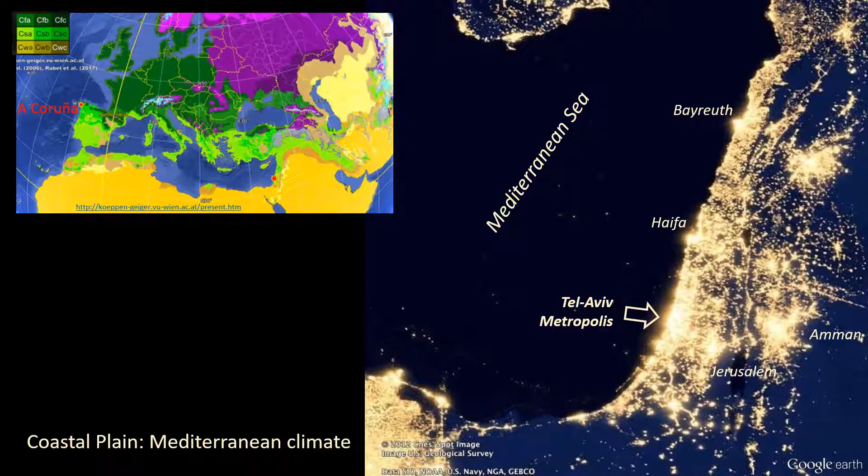My name is Inbal Gadish and I'm honored to talk about thermal comfort in public spaces of a densifying Mediterranean business district. Working as a regional planner in Ramat Gan municipality, I'm responsible for town planning in my case study area. Israel is located in the eastern part of the Mediterranean zone, which is a hotspot for climate change. Some of its geographical characteristics illustrate the need for optimizing the use of lands in the country.

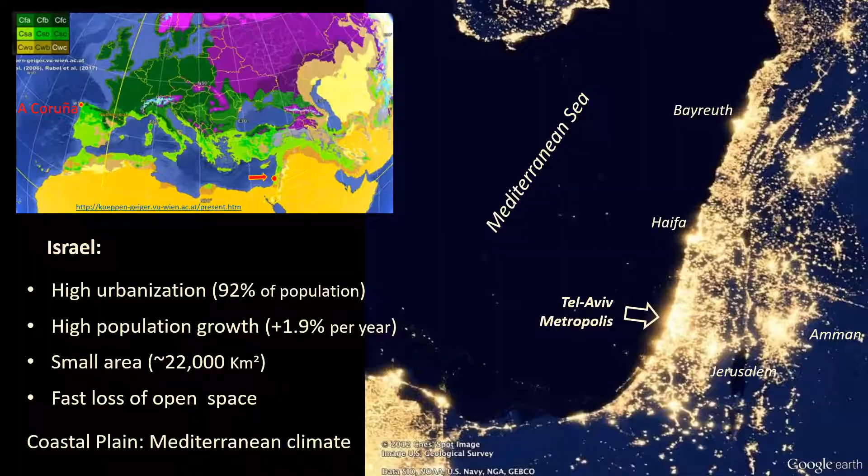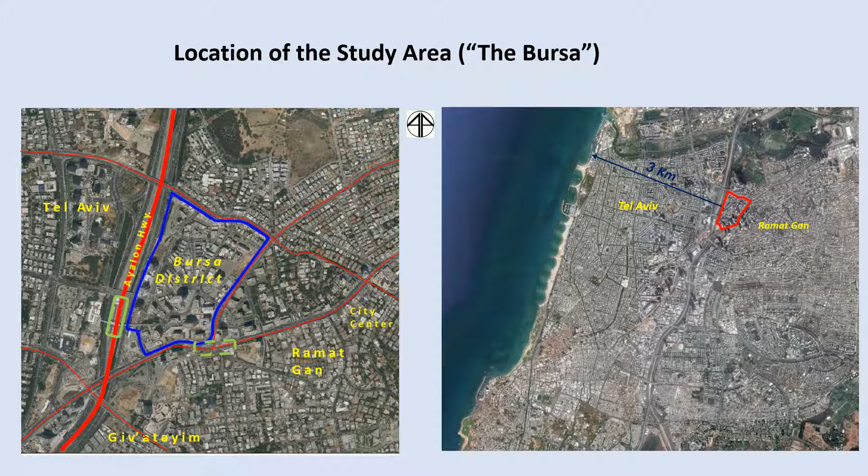Our case study area is a historic diamonds exchange and industry district called the Bursa. It comprises about 30 hectares of mainly office buildings located in the central metropolitan area in Israel, about 3 kilometers from the coastline. A new master plan promoted by the municipality permits multiplying the 1 million square meters of existing built floor area by about 3.5 times, which may lead to an extremely dense LCZ1 all over the complex. The plan visions the district as a bustling multi-purpose urban center.

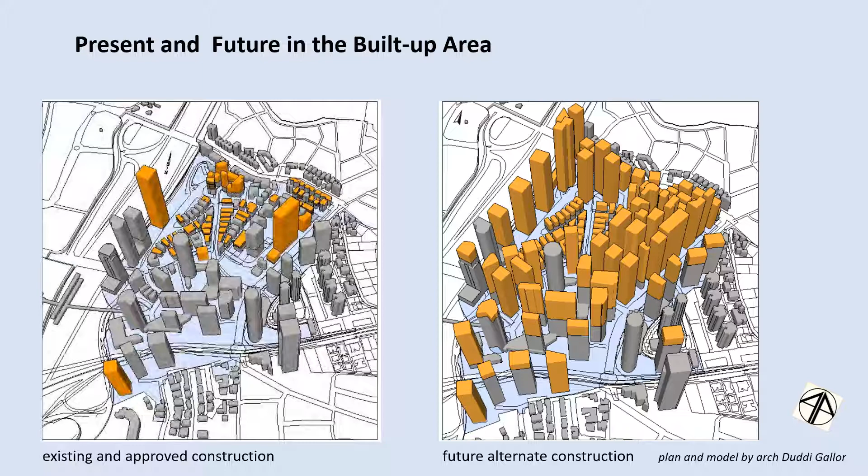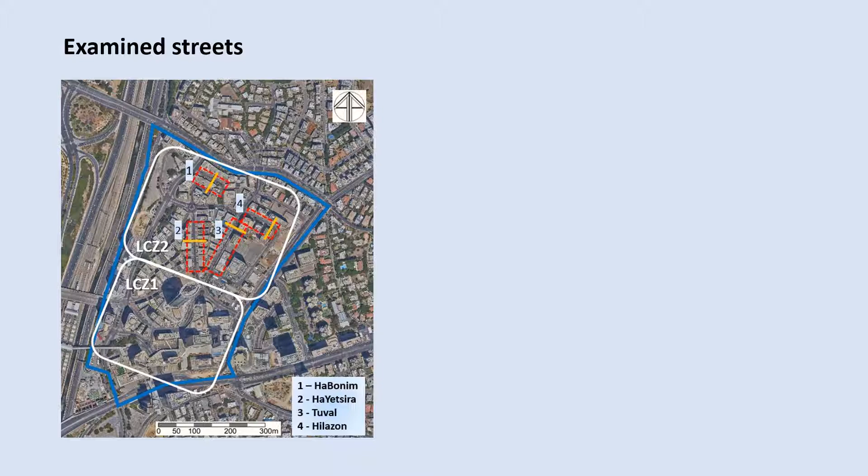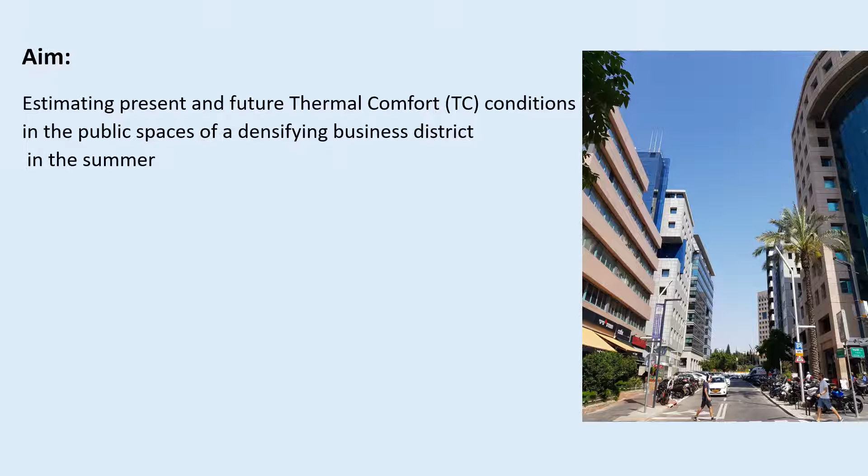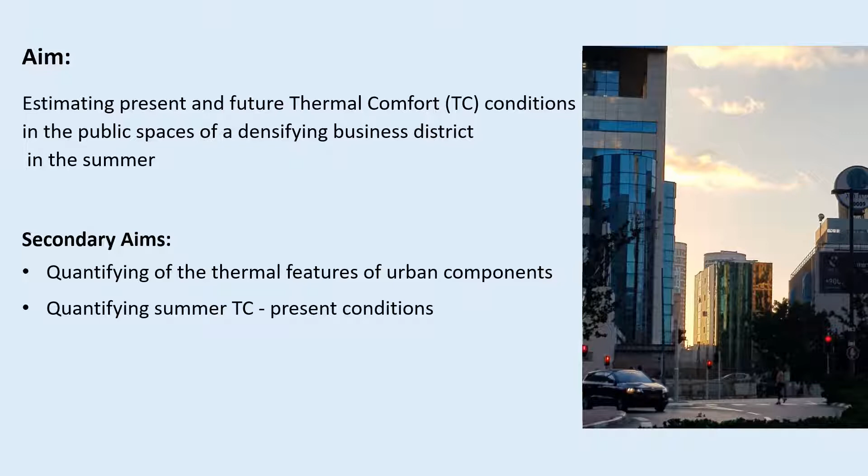Our case study streets are located in the northern densely built section of the district, characterized by LCZ2. We focus on two approximately perpendicular streets described on the right, including existing and predicted sections due to the new master plan. So, the main aim of the research is to estimate present and future thermal comfort conditions in the public spaces of a densifying business district in the summer, and the secondary aims deal with quantifying the thermal features of urban components, quantifying present summer thermal comfort conditions, evaluating future thermal comfort using sensitivity tests, and examination of customary approaches to reduce thermal stress.

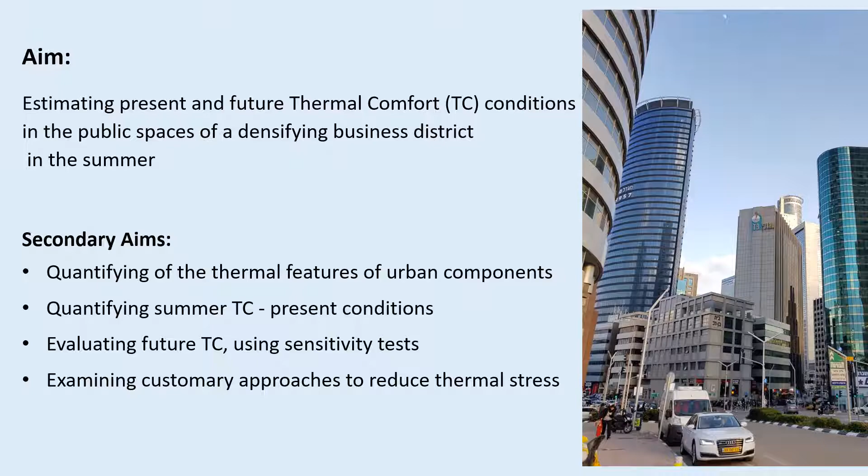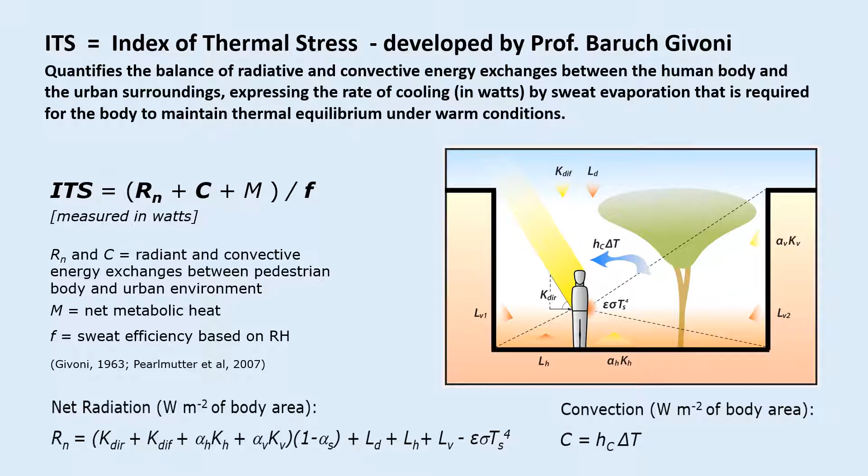We use the index of thermal stress for the evaluation of the thermal sensations. It was originally developed by the late Professor Baruch Givoni, to whose memory this conference is dedicated. Some of you may know this index and be interested in several improvements we put into it for this work. It enables a comfortable and simple tool for dealing with complex issues. Measurements were conducted at the end of June last year on a typical summer day. Thermal characterizing of horizontal and vertical street surfaces is a unique requirement of the ITS.

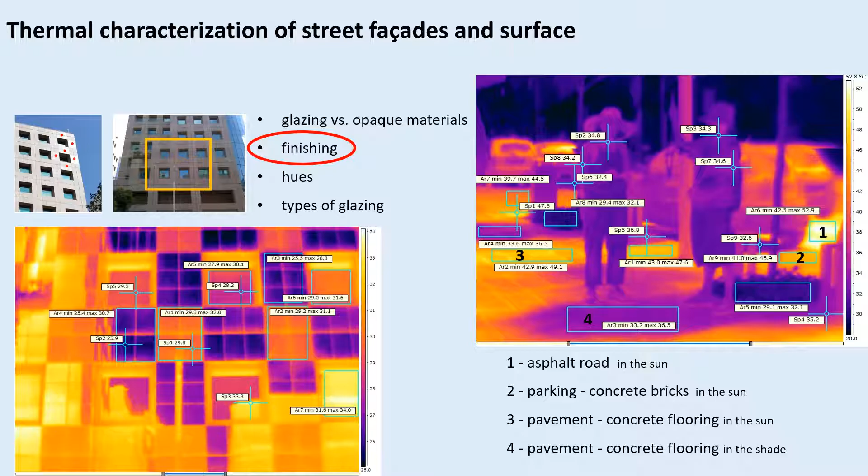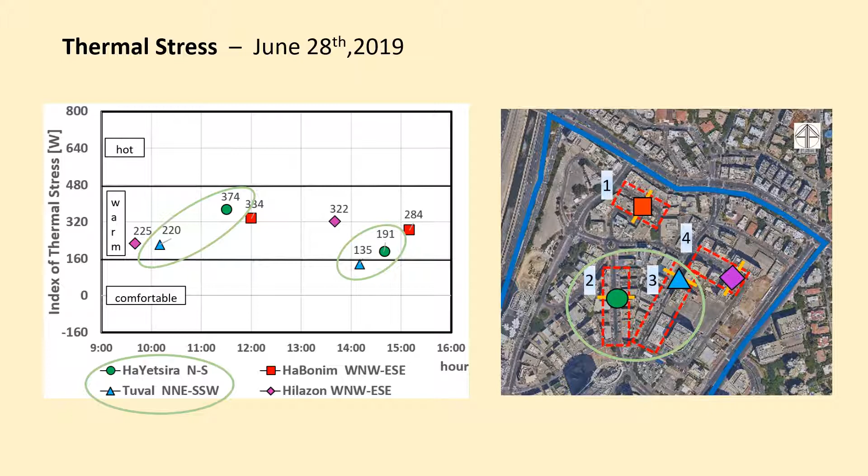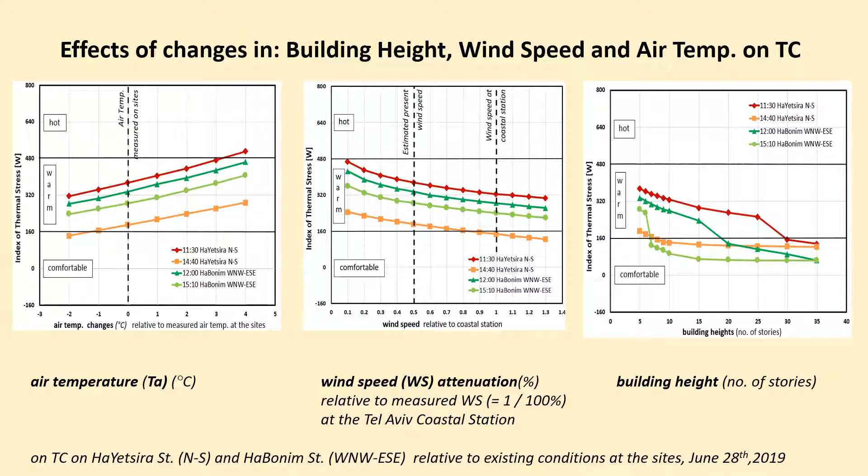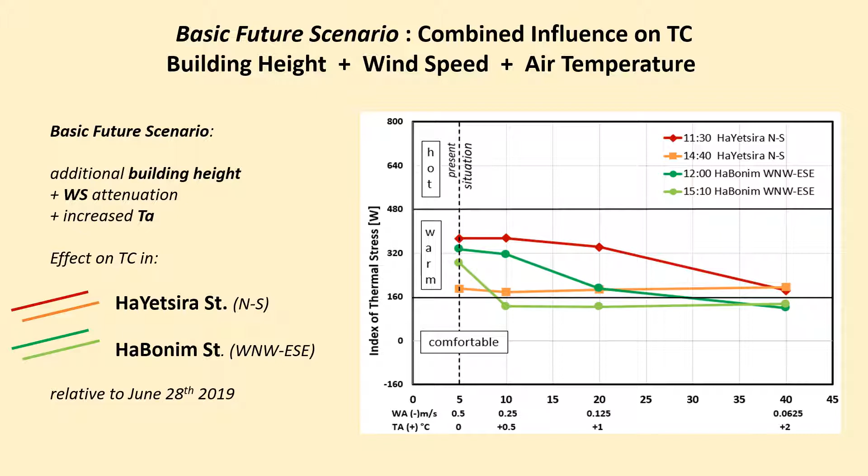We assembled the basic future scenario combined of the main variable of building height with correlated predicted changes in air temperature and wind speed attenuation. But although high construction is expected to ease the thermal stress, weaker wind and higher air temperature will worsen thermal comfort. All this refers to a hypothetical person who is in the center of the street cross-section.

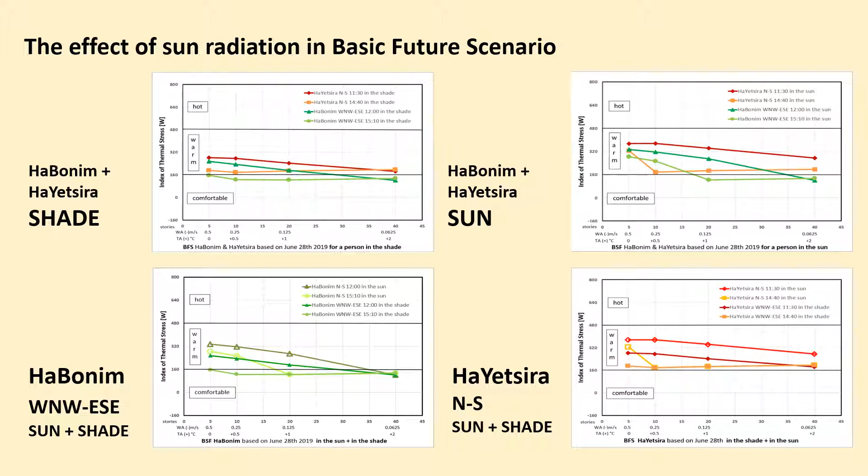Comparing between ITS of basic future scenarios for a person standing in the sun and in the shade reveals the effect of sun radiation on thermal comfort. The bottom graphs clarify how much hotter the north-south street is compared to the perpendicular one, even under high buildings. A combined influence of relative humidity with wind speed and air temperature reveals an extreme exponential impact on thermal comfort.

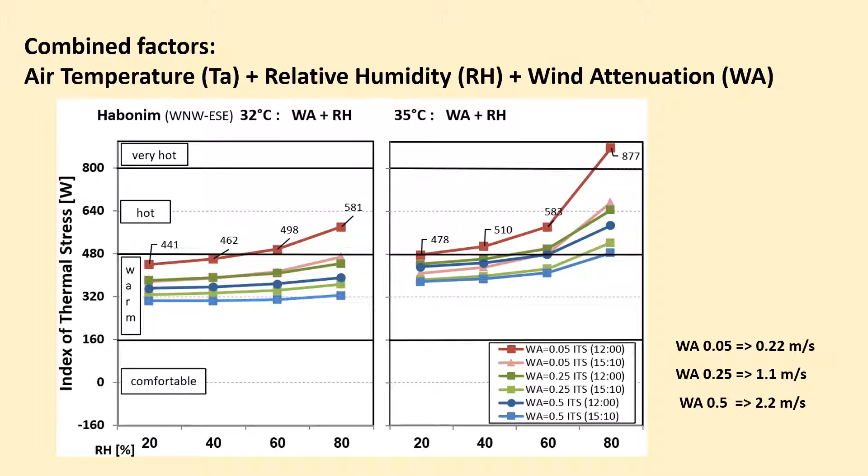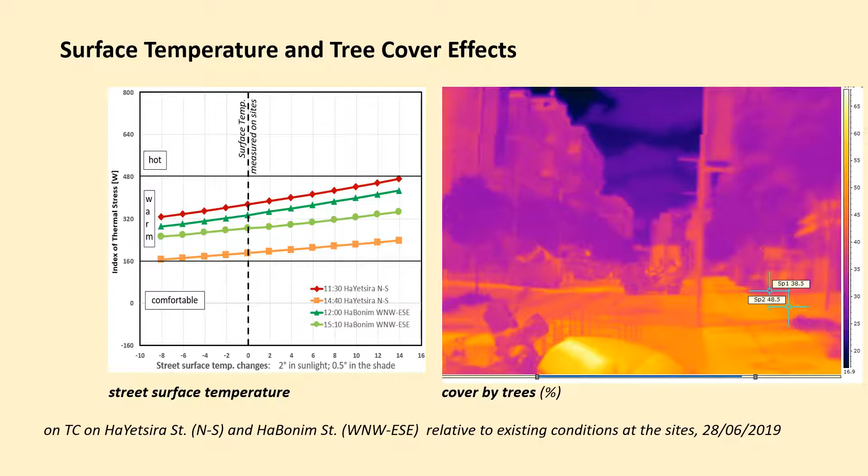Using cool materials for street horizontal surfaces is proven to decrease its temperature. We quantified its possible effect on thermal comfort. Trees improve environment and human welfare in many ways. ITS quantifies the effect of trees cover in the street on thermal comfort.

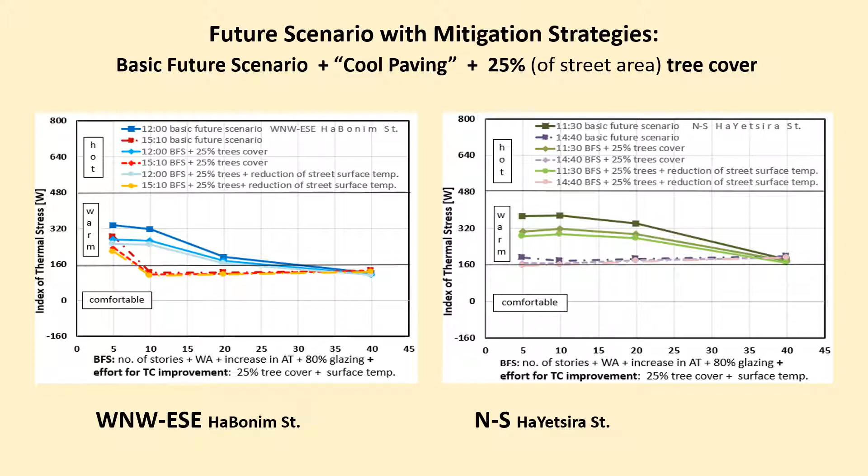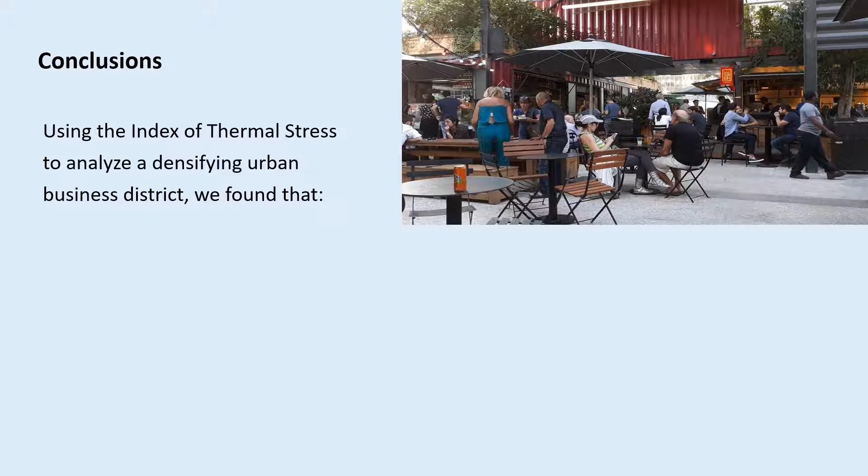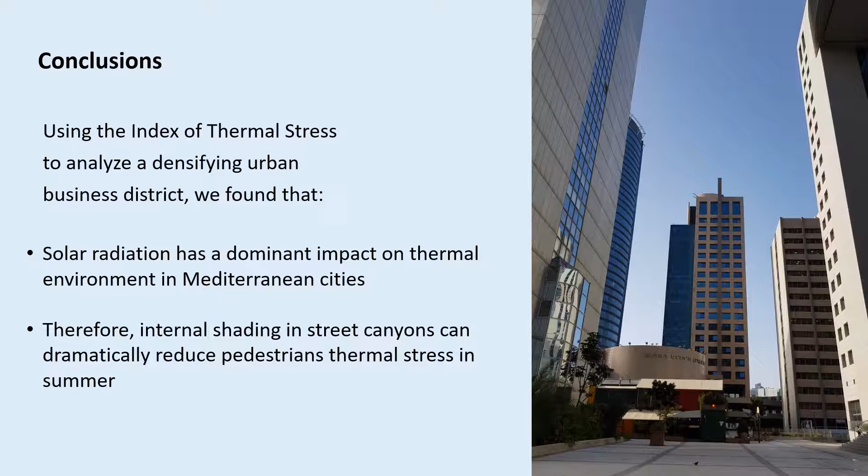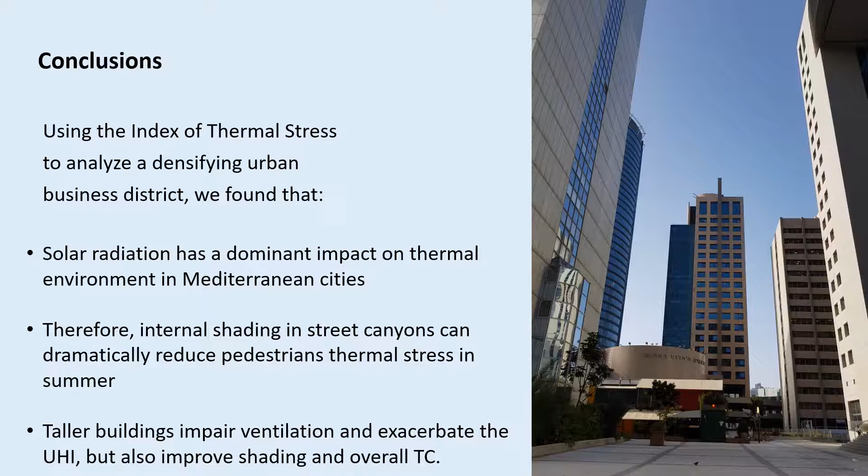In summary, using the index of thermal stress to analyze a densifying urban business district, we found that solar radiation has a dominant impact on thermal environment in Mediterranean cities. Therefore, internal shading in street canyons can dramatically reduce pedestrians' thermal stress in summer. Taller buildings impair ventilation and exacerbate the urban heat island, but also improve shading and overall thermal comfort.

Further research is needed in order to characterize the effects of glazing types and wind regime on thermal comfort in such a complex urban district. Also, a similar study is required for the winter season.